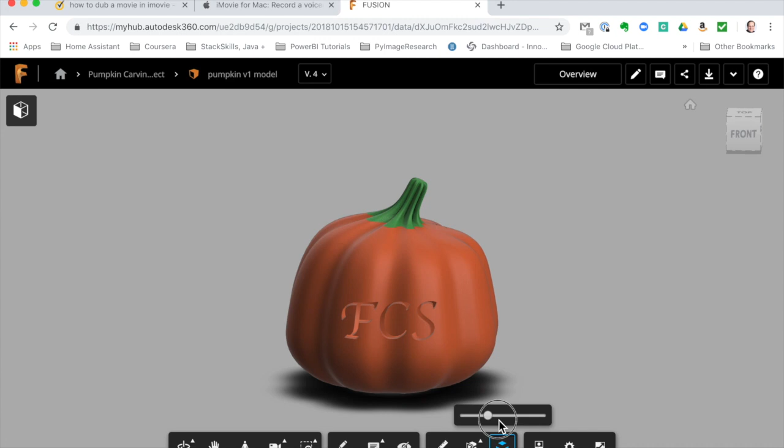Hi, this is a video that's going to help you use Fusion 360 to actually carve a virtual pumpkin. This is the end result viewed through the 360 web viewer. We're going to create this in Fusion 360 using sculpt mode, then convert it back to a body and configure three different bodies: a body, a top, and a stem, so that you can actually carve the pumpkin and put something inside if you wanted. All right, so let's get started.

So we start with the typical Fusion 360 dashboard. In this case, we're going to create a new design and go right into the form area. We're going to use the sculpt area, not the model area, which will give us the ability to really create a very interesting shape and move it around and so forth.

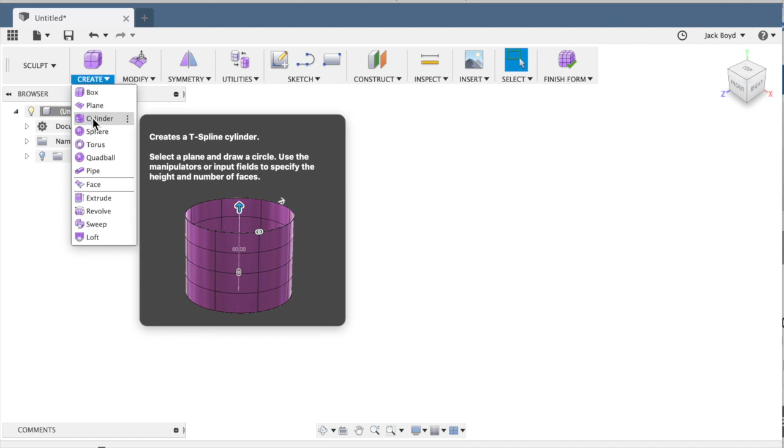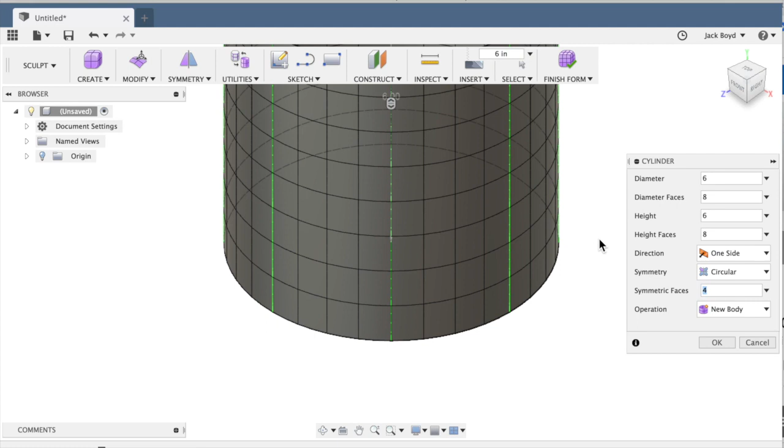So we're going to start with a cylinder, 6 inches in diameter just to start. Then we'll adjust the number of diameter faces to 8, put the height maybe 6 to start, we'll stretch that out later, the number of height faces to 8, and symmetric faces to 4. This will give us the ability to do what we need to do.

There are some interesting tabs around the cylinder that let you change the number of faces as well. We just use the table there to put that in. So this is the way you start. The symmetric faces will be important, as you'll see in a few minutes.

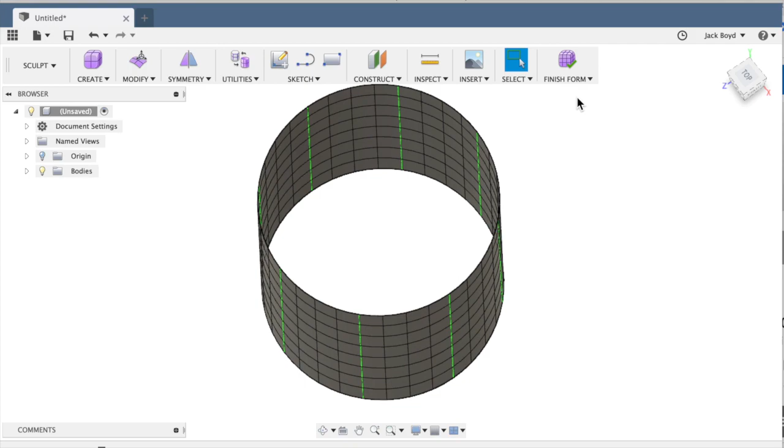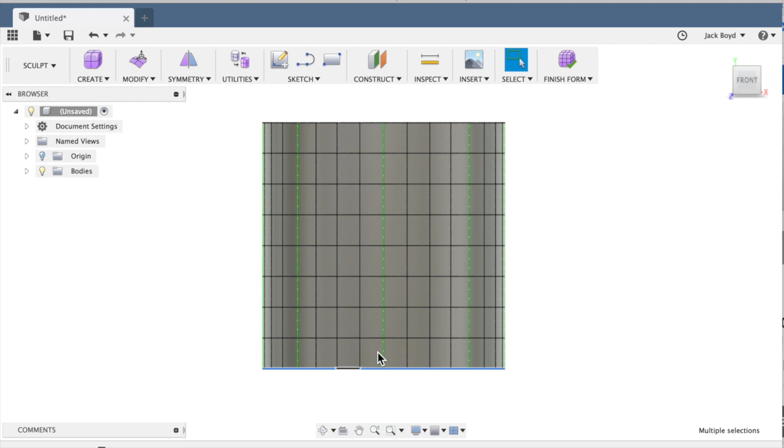So we're in the form area viewing the cylinder. What we're going to want to do is adjust the dimensions of each of those lines, starting with select. We're looking to see that the select-through tab is clicked, because when we select a line like this very bottom line, we want to select the whole bottom of the cylinder, not just the lines in view from the front. This will give us the ability, when we adjust, to squeeze the whole bottom of that cylinder down.

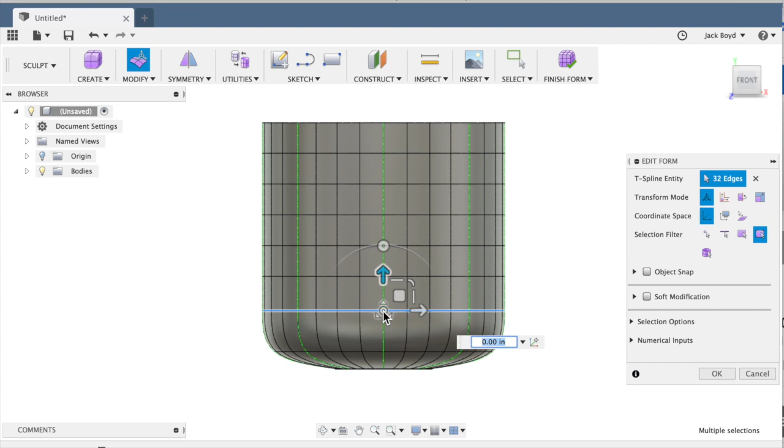So we're going to use this feature, edit form, and use these functions to really shape the pumpkin any way you want. You can have some fun with this, moving it out and in and stretching it up and down.

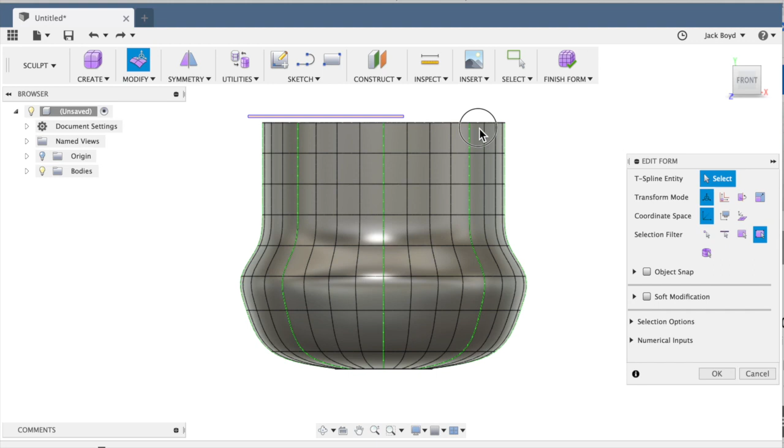We're going to use the top two concentric circles as the stem, so we'll shrink those down pretty narrow. There's a couple of ways you can do this: with the whole form, where it has all the faces, or just by selecting the edge, which gives us a little more control. So we're going to do it that way.

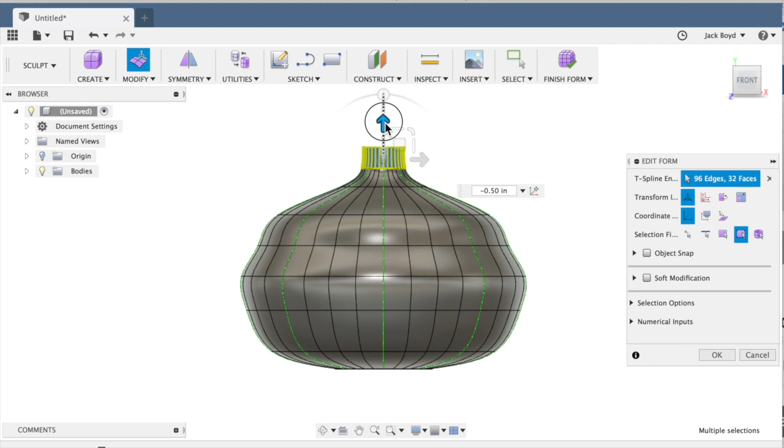Just shrink that down to something that leaves a little bit of what would look reasonable as a stem to the pumpkin. Now we'll play around with all the different concentric circles to figure out the right shape, and we can stretch it up and down and in. While we're in the mesh mode, in the sculpt mode, we'll have the most flexibility there, so have some fun with this.

If you find that your pumpkin is only stretching in one part, not the whole thing around, go back to select and make sure you have selected select through, and that way it'll connect all the lines behind the line you see on the front. So we're just going to move this around to select a pumpkin shape that makes sense. I'd suggest doing something that makes your pumpkin unique to your design, and you can play around with some of the function keys that you see there.

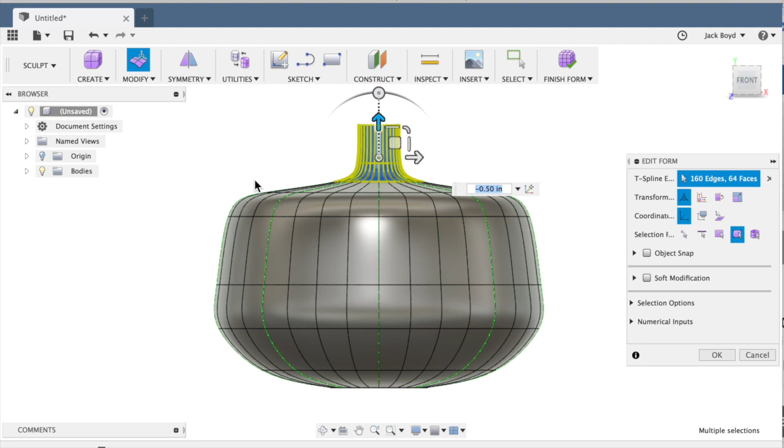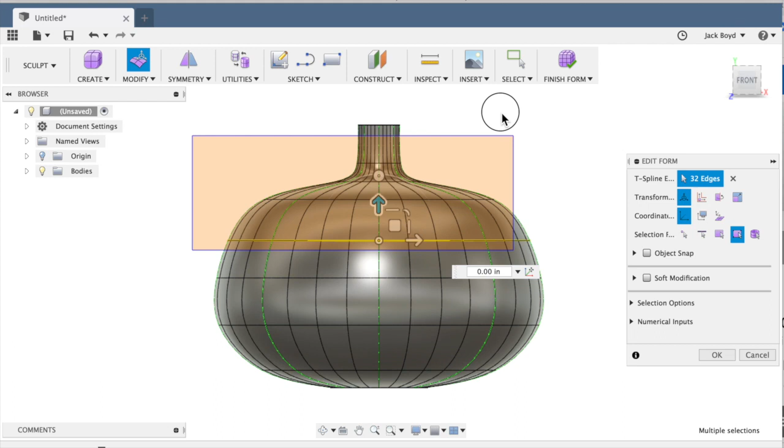By the way, the symmetry lines that we set up in the very beginning are those dotted green and yellow lines that come down. We'll go back to those later, but it's important because we want to be able to create a symmetry so that when we adjust any of those special symmetry lines, all the lines follow the same moving feature. That'll be important when we want to make the wrinkles in the pumpkin uniform across the face.

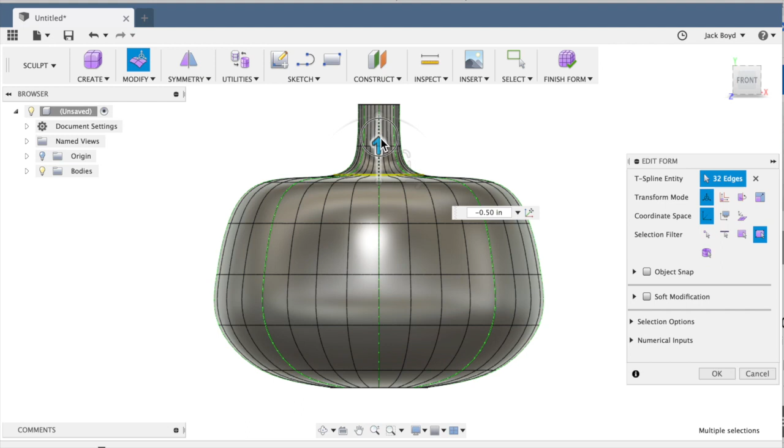There's one more function in that edit form, you may have seen it pop up: extrude. You can actually extrude and create a new face in this area. On a Mac keyboard, you hit the Alt button and then move that. Like I'm doing here, I'm not using the Alt, but if you wanted to play around with the Alt, you'd actually see something new being created. You can use that for some very interesting things as well.

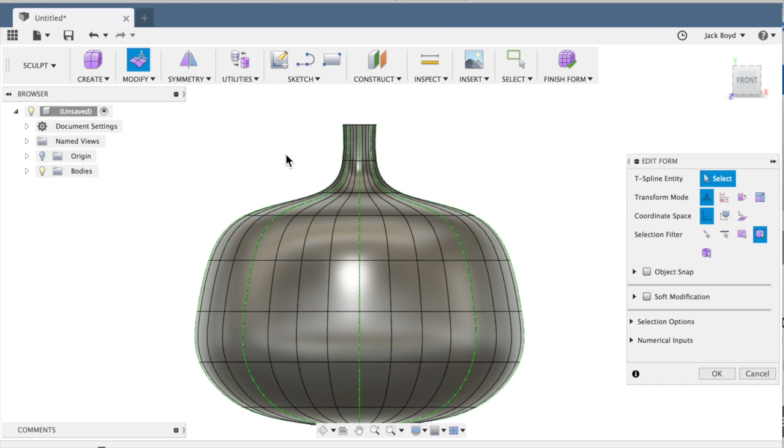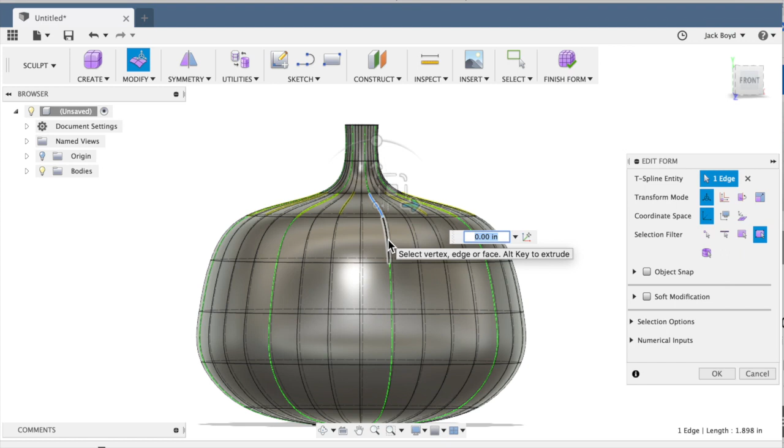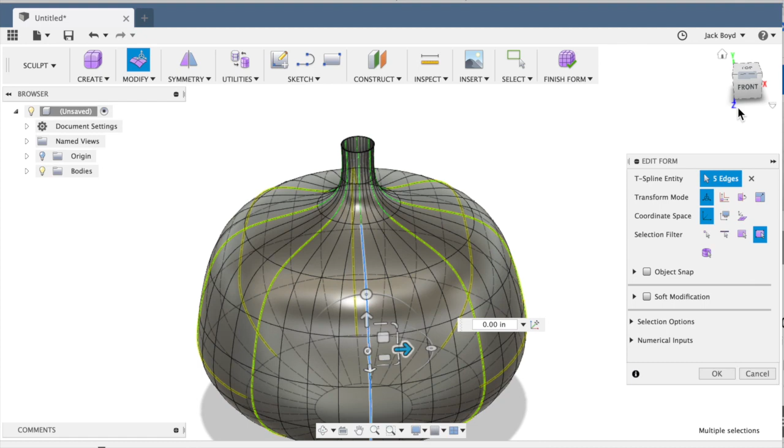Okay, that's looking pretty good. I think we're ready to shrink in the wrinkles in the pumpkin. Here's what we're going to do: select and hold Command on the Mac to select all the lines down the front of the pumpkin. You don't have to select the ones at the very bottom, and leave the ones at the top open as well. That's going to give you the ability to really put the texture in the pumpkin. Now go back, select the arrow that's pointed out toward you, and then we're just going to push in.

You can see the pumpkin now starts to take form. Looking at it from the top, that's probably a little too much, so let's move it out a little bit and give it a little more of a realistic view. That looks pretty good.

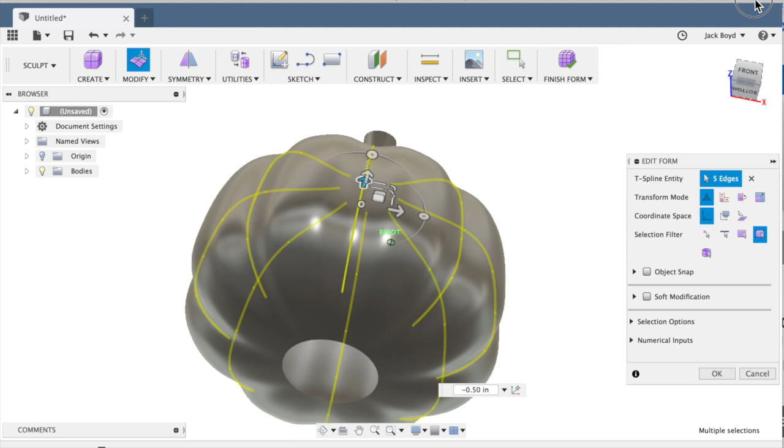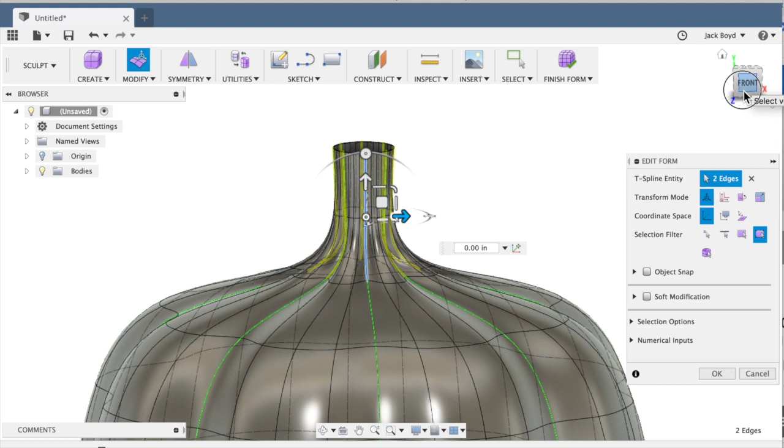Now we're going to do the same thing with the stem. We want to give it a little bit of texture too, so we're going to select on the very front of the pumpkin, select the two vertical lines right there, holding down the command key first so that you get both at the same time, and then just push that in just slightly. What you want to be careful of is don't push it too much. You don't want any of the edges to overlap, otherwise you can never create a model based on this.

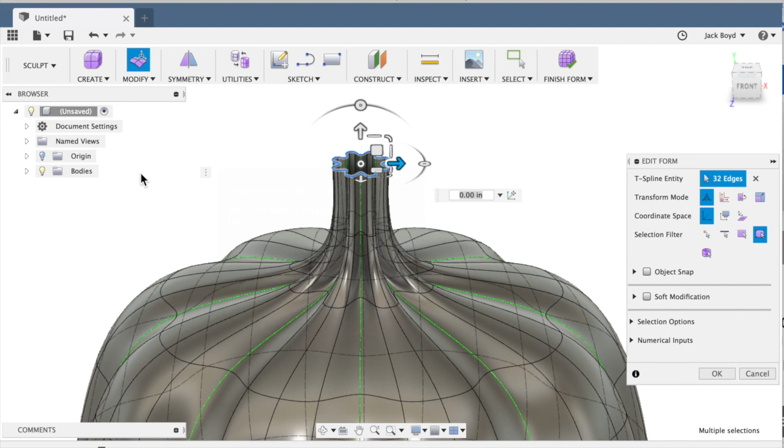Give it a little bit of character there, and now we're going to just select the very top line, and we're going to use the fill hole feature, and it's going to put a nice hole on the top of the pumpkin, or fill the hole on the top of the stem.

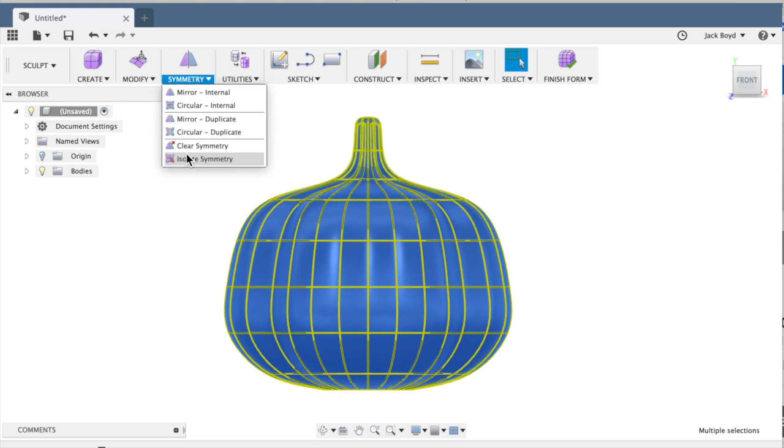Now we're going to play around with moving this around. You can do anything you want here. We're going to take the symmetry away so that we don't have any unexpected changes. But once we take the symmetry away, we can still use the sculpting capability and stretch the pumpkin in some fun ways.

Let's select the part of the stem that we could use to move around. Now we're going to do an edit form on that portion. We've selected the whole stem, selecting both sides, and now we can rotate and do some interesting things. Let's give it a little bit of a slant, move it around a little bit.

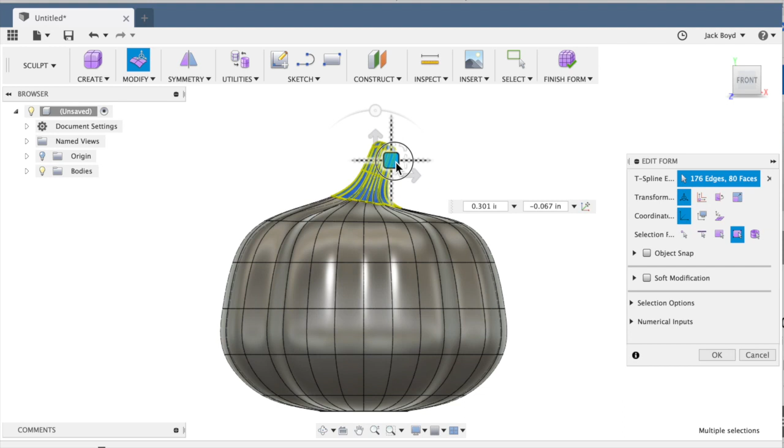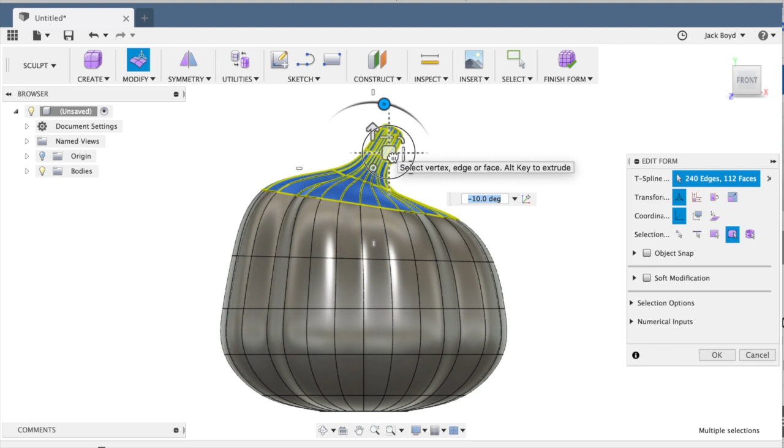That looks pretty good. Now maybe the pumpkin doesn't really need to be as symmetric as it is, so let's stretch it up a little bit more, give it a little more height. Now we can do some interesting things here, move it around and give it a little more of a natural shape, perhaps. Okay, that looks pretty good.

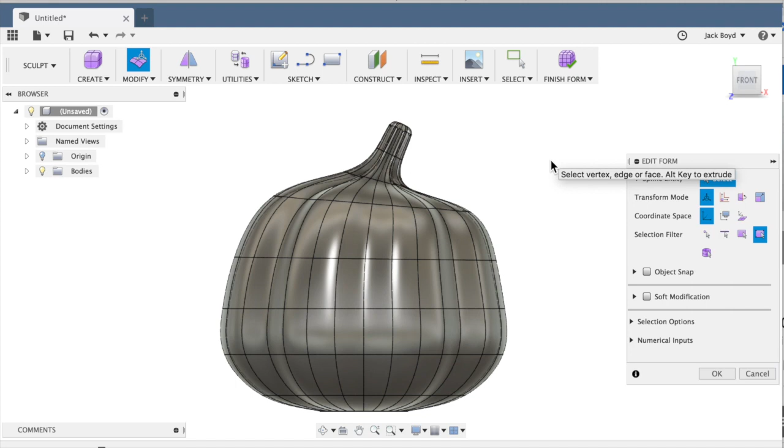You'll notice when you try to select things, sometimes you can select more than you really want, so you can just continue to look and see what gets highlighted. Now I can move this around even more and just select the faces that I want to stretch. Okay, that looks pretty good.

So now we're going to save this and name this file. Let's call it pumpkin. Maybe we'll make sure we have a new project for this, so you can click down at the bottom, create new project. We're going to call it pumpkin carving project, that way all the files you're using are in the right collection.

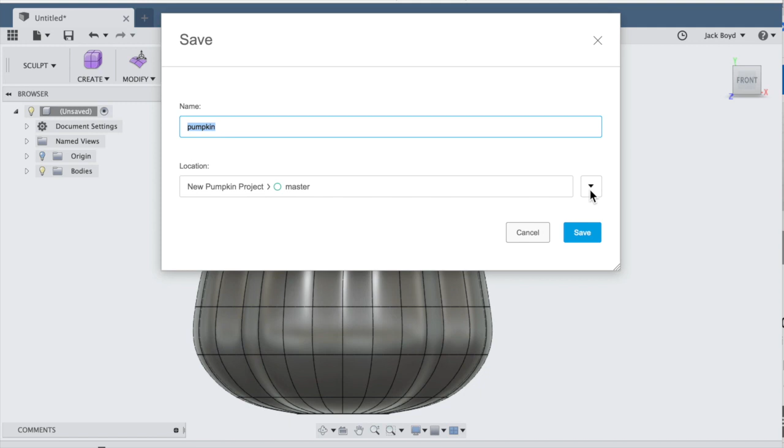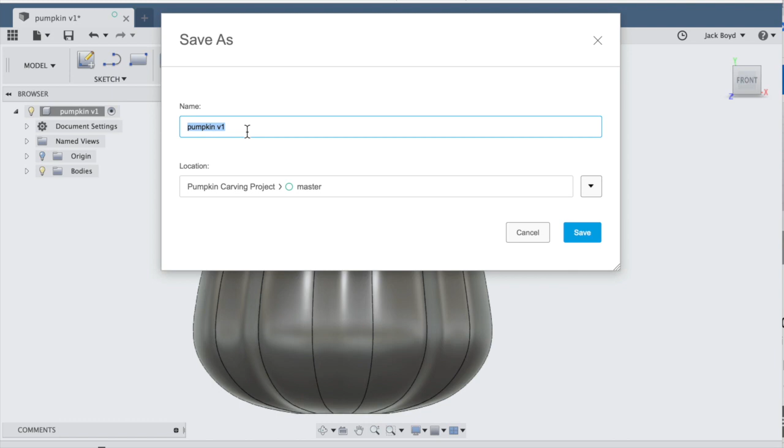Okay, now name your pumpkin. What we're doing here is creating a copy that's in the mesh sculpt version, so if we ever need to come back, we can come back and modify it. Now we're going to finish the form. If when you do this it says you have an error, it means you've probably done some things with the symmetry shrinking that you need to go back and look at. But hopefully it all converted correctly.

Let's save it one more time so that we have a record of the model once we've moved it back to model mode, and we're going to save it and call it model. That way I'll go back to it if we need to.

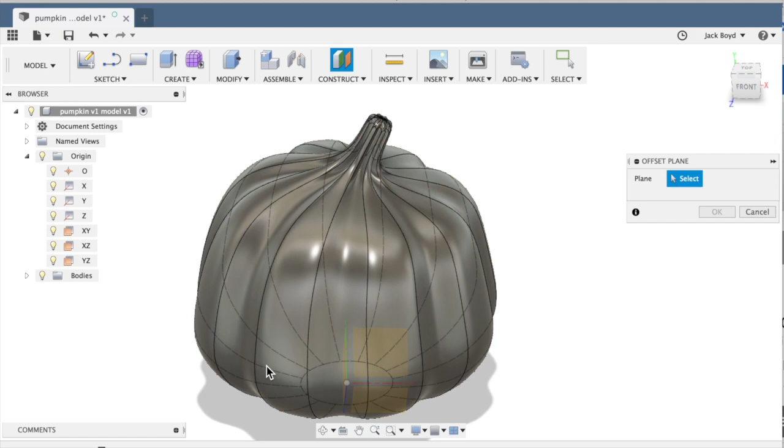Okay, so now what we're going to do is take the pumpkin. Right now it's a shell, all one body, and we're going to carve and cut off the top. Just like you would in a normal pumpkin, you would cut a hole in the top, we're going to do that here. We're going to create a construction plane that is parallel to the very bottom of the pumpkin, and this is going to be the line at which we're going to cut the top off the pumpkin. So just put it up there where you think is good.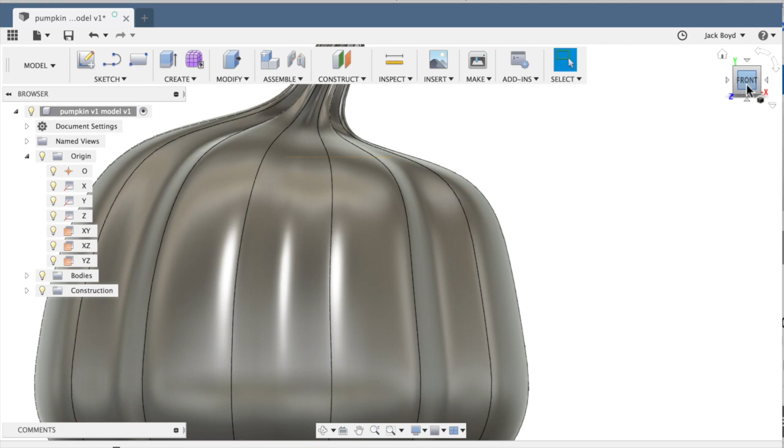We'll create that construction plane there, and now we're going to use the create or modify area, split the body on that construction plane. You can select the body, and then what's easy to do is just select the construction plane over on the left, and that way that's the plane at which you're going to split the body. So you can take a look at it, make sure that's where you want it. Yeah, that looks pretty good. That'll give us an opening in the top of the pumpkin.

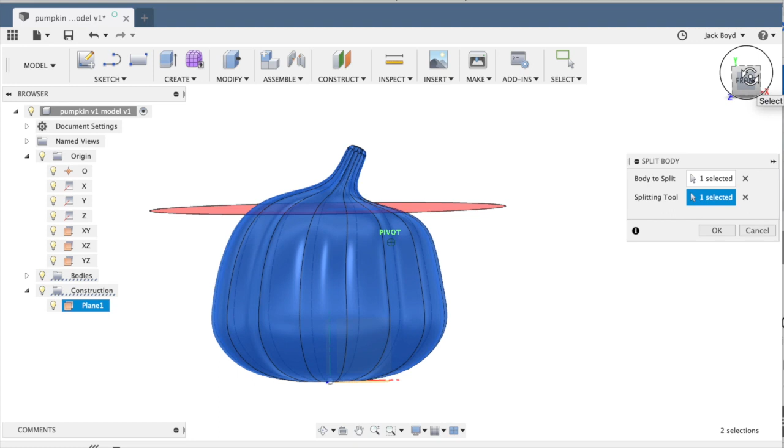And now we have two bodies. We can name them - we could call that the top, and we could call that the bottom. But we have one more cut to make. We want to cut the stem. Even though we won't necessarily ever detach the stem, we want to create a separate body so that we can color it differently than the rest.

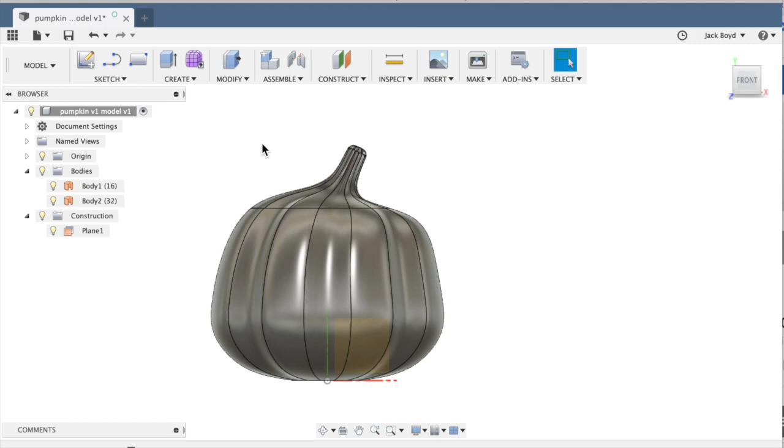So to cut the stem, I'm going to go into sketch mode and create a line on the vertical plane. I'm going to select the vertical plane, and I'm going to draw a line that gives me the ability to do what we just did, split the body. I'm going to split that very top body at a point where I want the stem to be, a green stem.

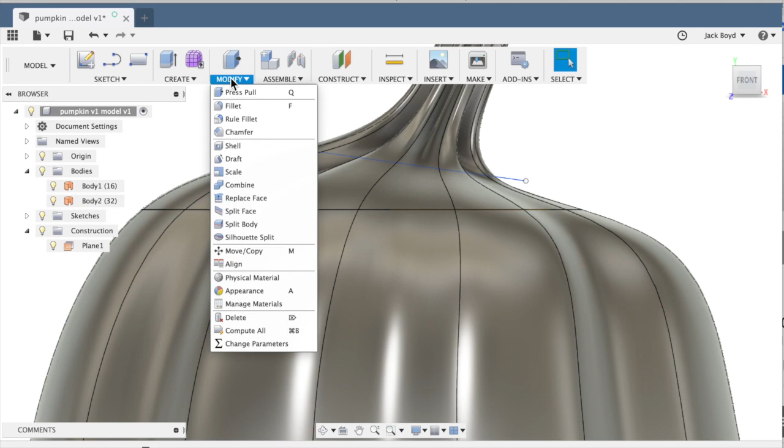So now I'm going to stop the sketch. Now I've got a line that's in the vertical plane, and I'm going to do the same thing. I'll go back and say split body on that line, and now I have two bodies, actually three bodies now. I have a stem, a top, and a body.

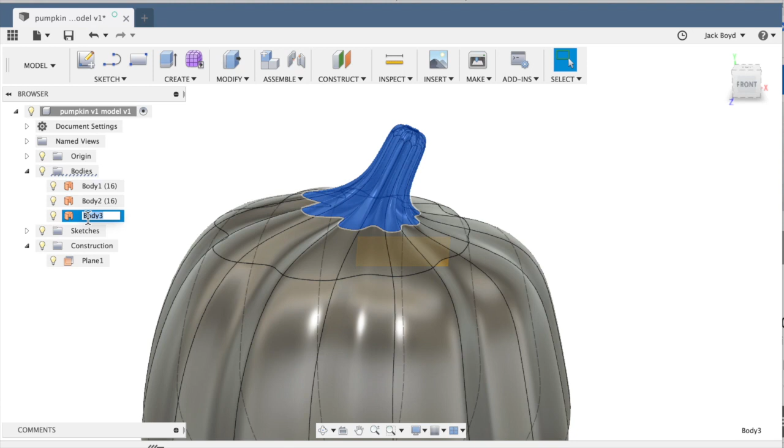So I'm going to go ahead and just type that in, because when we move it to another program to do some other things, it's just as easy to have the names there correctly.

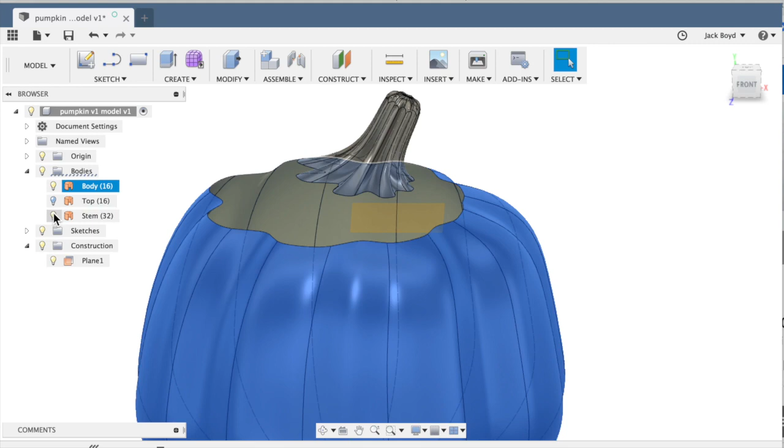Now the body is still a shell. If we want to carve it, it's not going to show any thickness. So what we need to do is hide the top and the stem and look inside the pumpkin.

And we're going to use a feature called thicken, which creates a thickness to a surface. So there it is right there. We're going to click that, and we're going to use a minus quarter of an inch. And that looks pretty good.

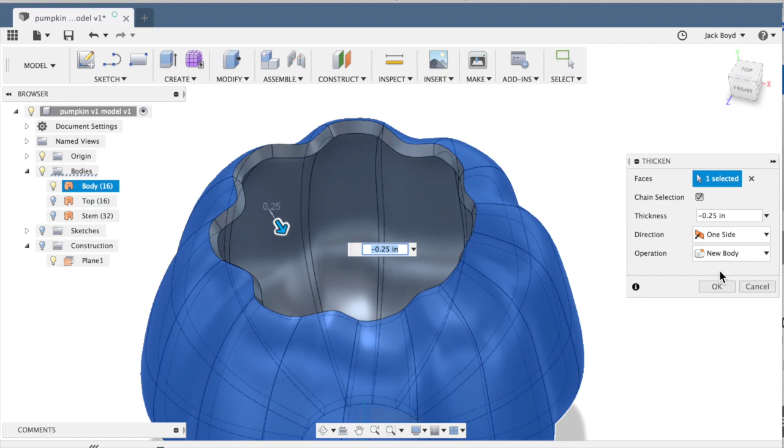You can make it thicker if you want, or thinner, but you want it to be able to show some thickness, so when you do the carving, it looks like a pumpkin. So that looks pretty good.

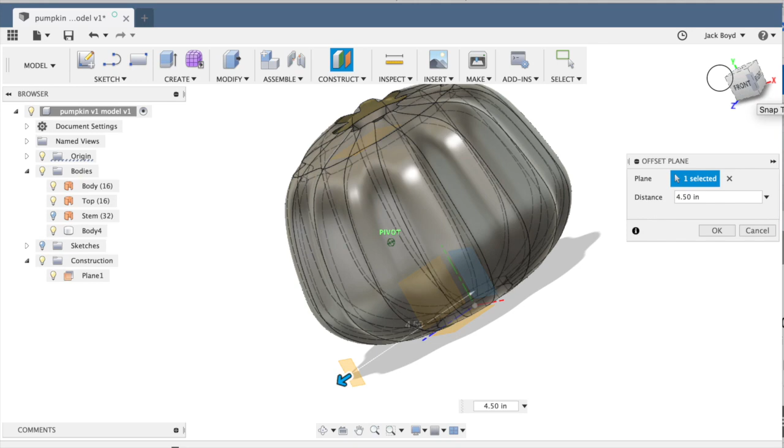So here we go. We're going to create a construction plane off the vertical plane of the origin. I'll turn on the construction plane so I can see it. Now just take the construction plane out far enough so that it's beyond the face of the pumpkin. That way, when we put some text on it, it'll be out far enough, and then we're going to extrude and cut into the pumpkin after we create the sketch.

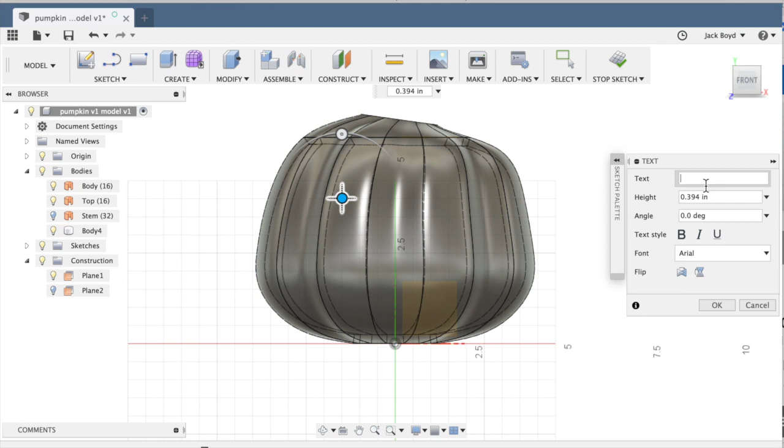So now you select the construction plane. We're going to select text, put an initial point there, and then type in whatever you want. This is something you control over the side. I'm going to use a height of maybe 2 inches. That looks pretty good compared to the pumpkin size, and you can pick whatever font you want.

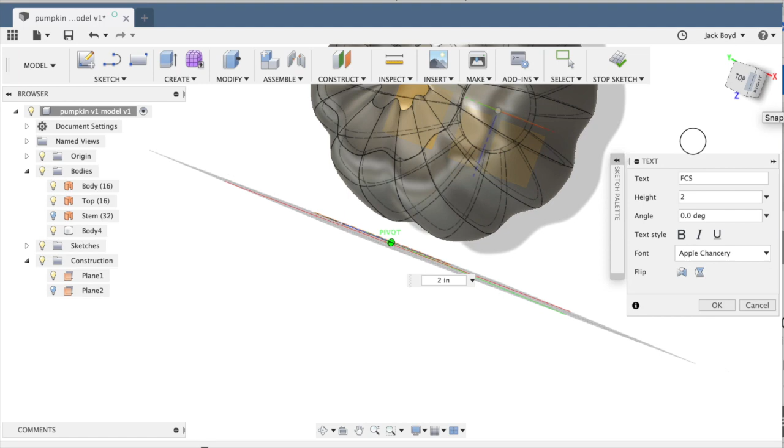So it looks pretty good. And that's going to now be out in front and purely just for constructing the carving.

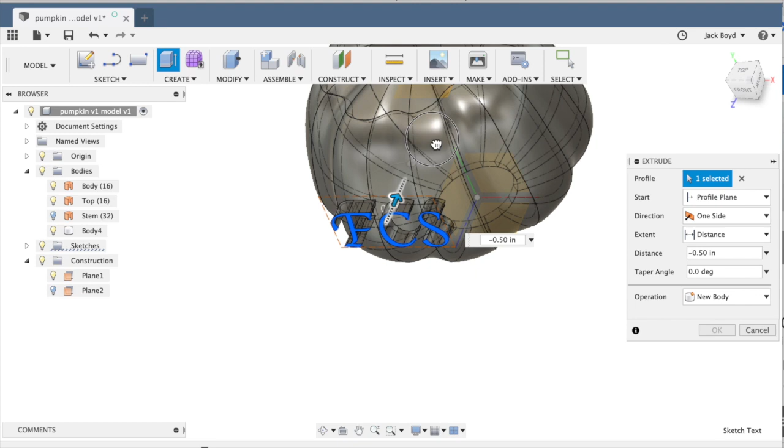So we'll stop the sketch. We will go back in and now do a push-pull or press-pull and carve the pumpkin. And if you want, I would suggest go ahead and do something in the back, maybe put your initials or name in the back so that there's something to personalize the pumpkin for you.

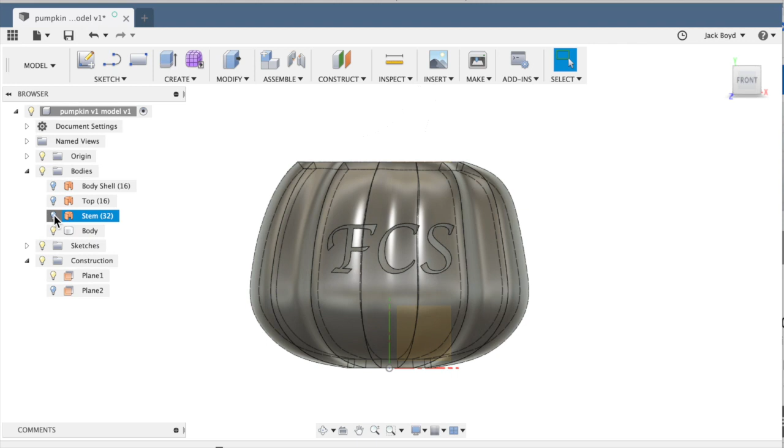Okay, so now we have a carved pumpkin. That looks pretty good, except that we need to figure out how to color that. So let's go into appearances.

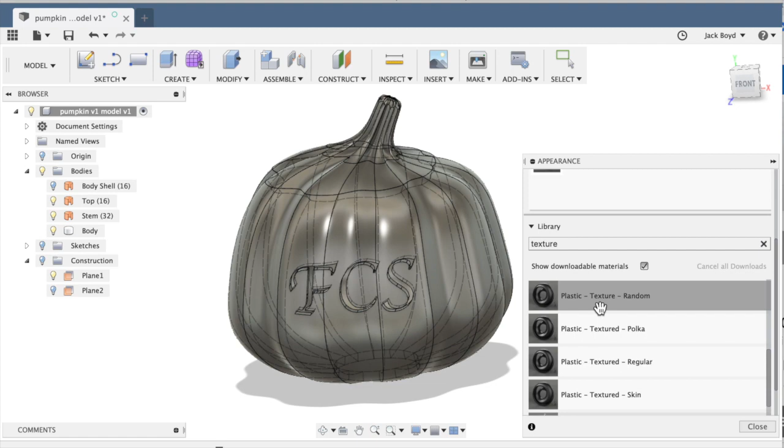Now, if we search for texture, in the standard Fusion 360, there's not a lot of texture. There's not a pumpkin texture. So if you look at some different plastics, they look pretty good. If you zoom in, you can kind of see what that texture looks like. Random looks pretty good. We'll test another one and see what polka dot looks like. Probably not for a pumpkin here.

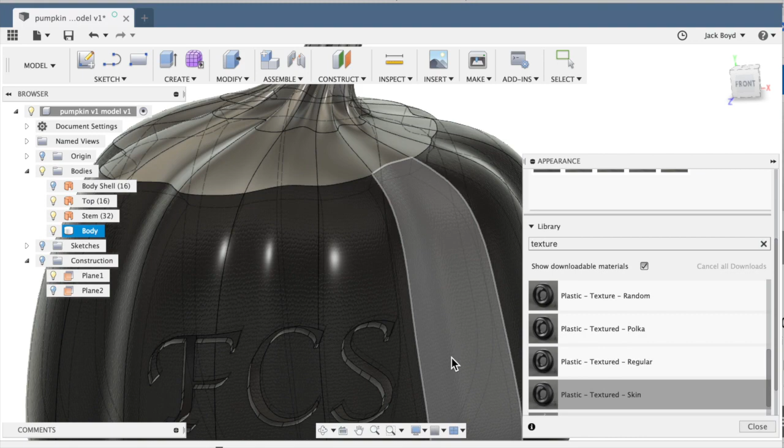There's what regular looks like. And skin has a little bit of a different texture. So let's try random, and that looks like a little irregular texture. We'll put that texture on all of the faces, all the bodies, and now we just have to color them.

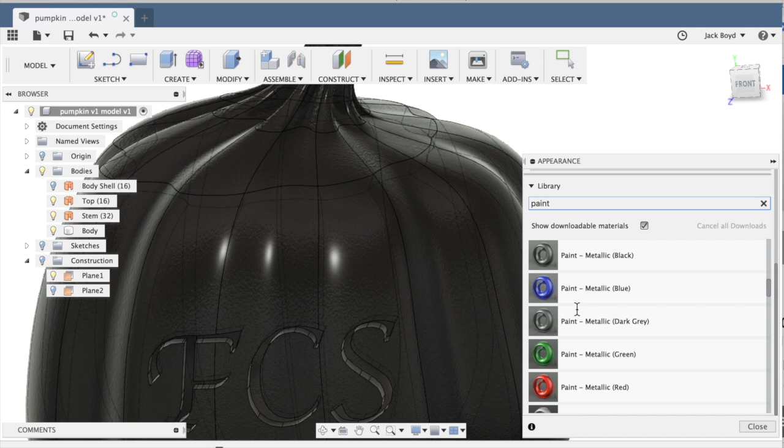So there happens to be a green color in the standard powder coat. We're going to do a powder coat rough, because we don't really want a shiny pumpkin. And we're going to color the stem green. So that works pretty well.

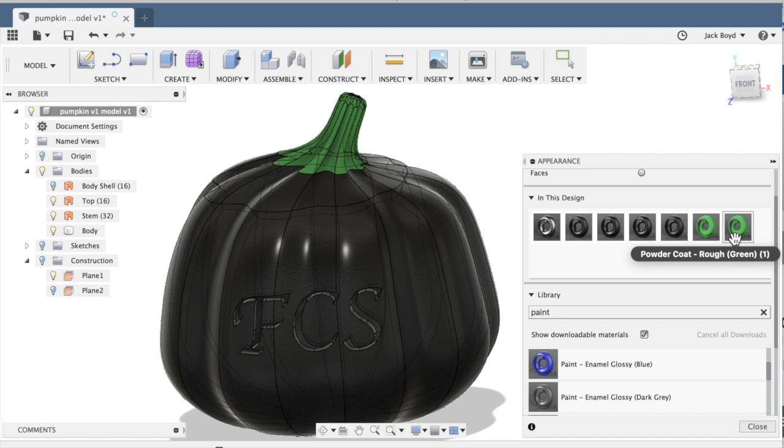The problem is there's not an orange in the standard colors. So what we're going to do is select a color and actually make it orange. We're going to take green and duplicate it. So right click on the color up there. Now we've created another appearance object here, and we're going to change that to be orange.

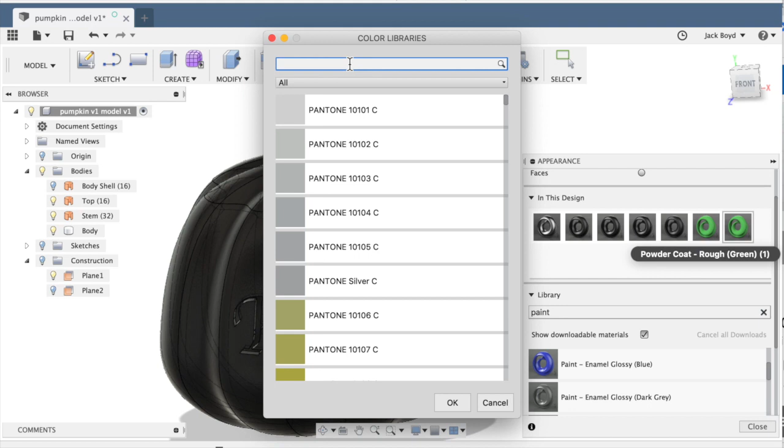Now you can pick whatever color you want. There's an interesting thing where you can use the Pantone libraries of many, many colors, or you can just pick it off the color wheel. Pantone colors are 16-1260 if you want to use that one, or you can use whatever you like.

Now we have an orange pumpkin color, and we can use that to color the two bodies there, the top and the body. Oh, I forgot to save it, so it shouldn't be a green pumpkin here.

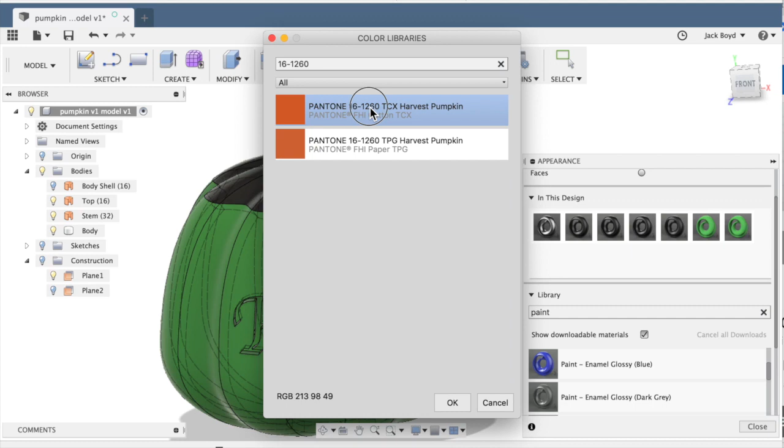So let's go back in and edit that feature. There we go. That looks better.

All right, so there you have a carved pumpkin in Fusion 360.